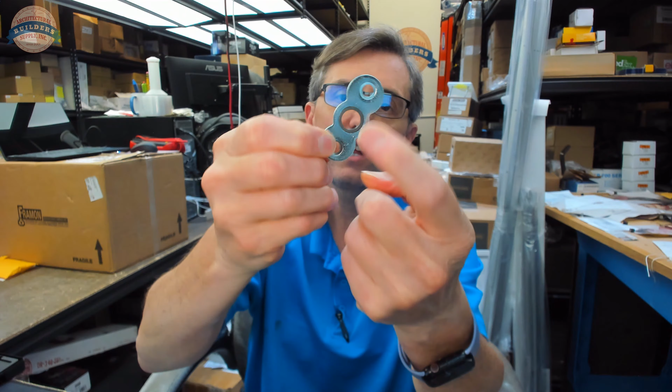The diameter of the pin is 0.432. The projection of the pin is 0.632. The overall length is 2.122. The overall width is 0.875. I would say this would take a number 10 flathead screw, would be my guess. The ID of that hole is 0.25. The door portion is going to have a bushing in it. Historically, that bushing was possible to purchase as a separate product. I doubt at this time we have any in stock, because Bommer, by the time you're seeing this video, is either completely out of business or at the very end of winding down operations. It's going to include 4 screws. They do flathead threaded sheet metal screws, number 10 by 1 inch, something in that range. And I'll do one final value, which was the weight, which is 0.1494.

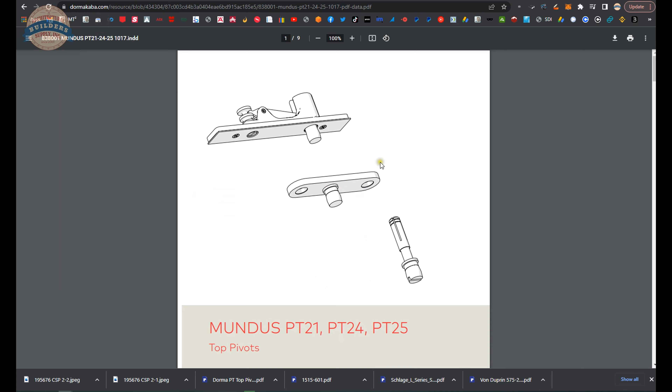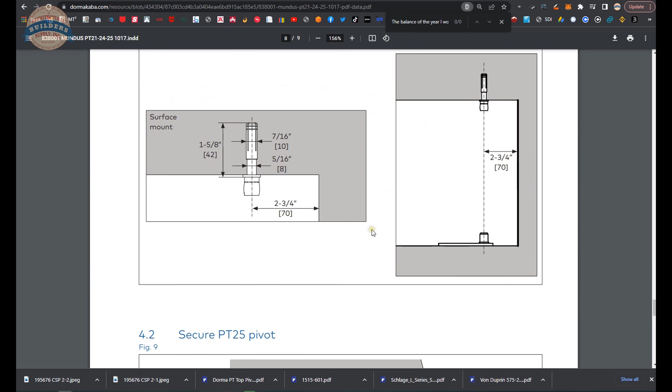There's a link below this video, as seen here, to the manufacturer's page. When you click on that, you'll be able to pull up what's left, by the time you're seeing this, of all the Bommer products we have available, by this horizontal navigation here. But a link to the product catalog, and if you wanted to see where else the 7890 was used, you'll be able to do a Control F or find function on your keyboard.

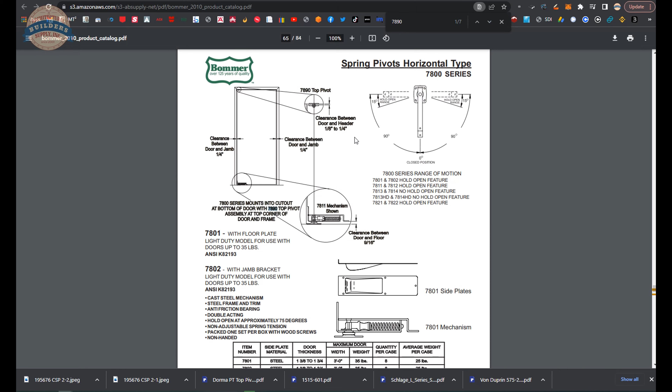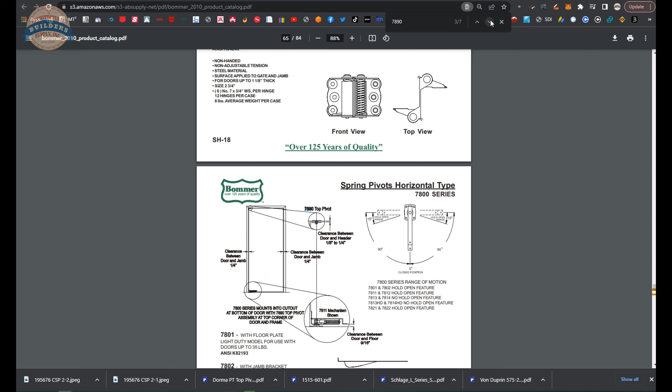And indeed, it's for the 7800 series horizontal spring pivots, a design that goes back to the 19th century and has been used in residential and commercial applications. Residential, between the kitchen and the dining room, countless untold times that 7890's been used. And here it is in the catalog.

There you go. If you have any questions on the 7890 or any other Bommer product, please feel free to reach out to us. And thank you.